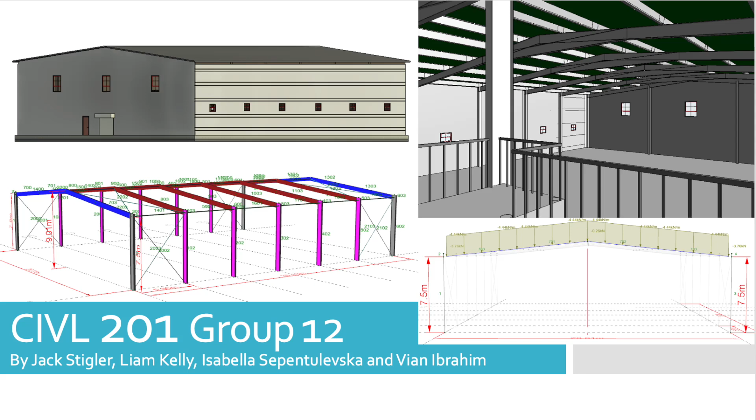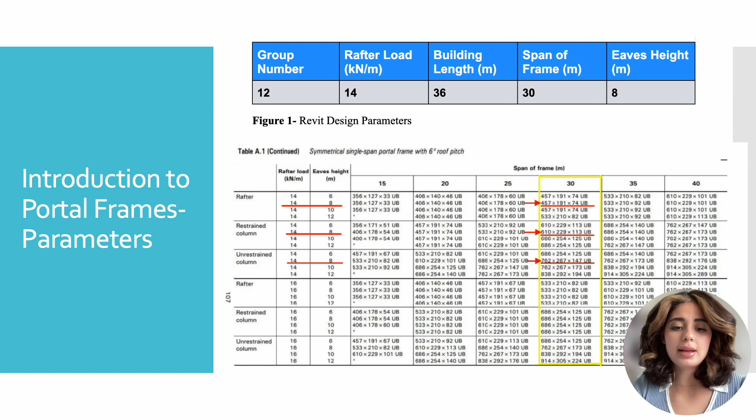Our project focuses on designing a portal frame. The main parameters include a span of 30 meters, a length of 36 meters, and an eave height of 8 meters with a rafter load of 14 kN per meter. Portal frames are commonly used because they provide a large clear span, cost efficiency, and flexibility, making them ideal for warehouse and industrial buildings.

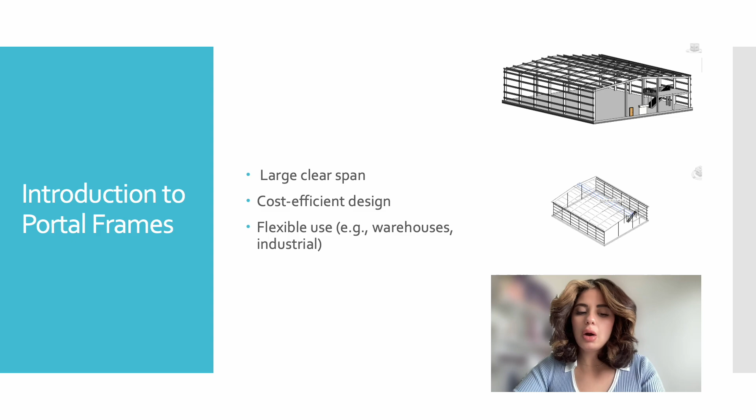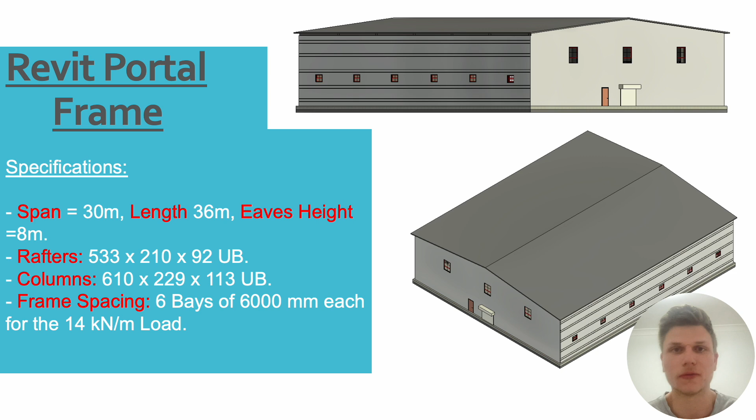These parameters were applied consistently across both Revit and Space Gass to ensure accurate modeling and structural analysis. The Revit portal frame structure aligns with the client's needs with 7 girts, 6 bays spread at 6 meters apart to distribute the load across the larger columns and rafters selected at 533 x 92 UB and 610 x 113 UB across the 30-meter span.

The 6-degree roof for wind and rain complications is essential, where the girt and purlin sizes still offer sufficient stiffness for spans above 5.7 meters while not compromising on material wastage, also effective for the length of 36 meters.

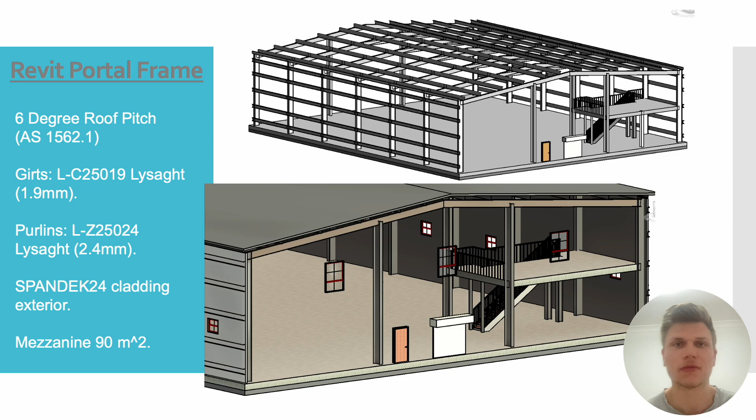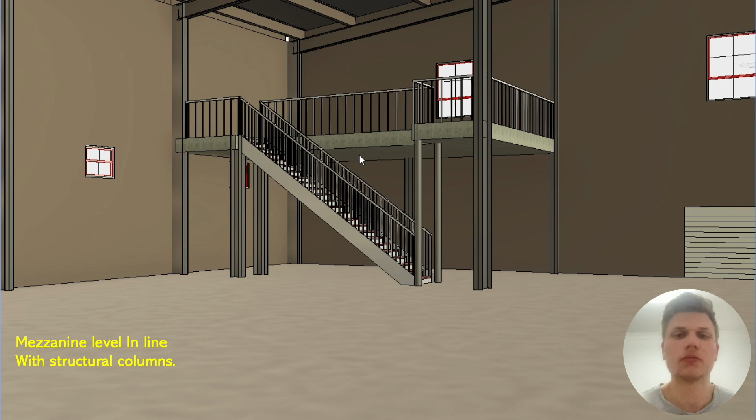In addition to the Spandek 24, the mezzanine size of 90 meters squared ensured it was in line with the structural columns and the floating platform for additional usable floor area. Secondary joists were also supported in the deck system, shown by the abundant essential floor area for the industrial setting. Structural framing connections involve the C-girt, rafter, and columns.

15 total windows of fixed and double hung ensure sustainable natural lighting and continuous fresh air flow throughout, while the large overhead door is suitable for deliveries and large loads in and out of the portal frame structure.

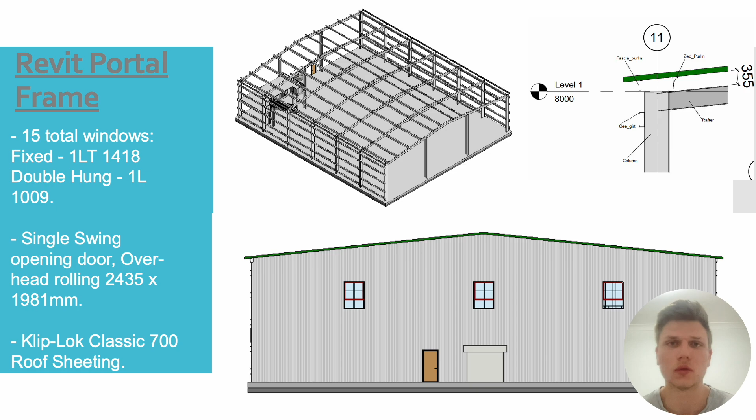Ultimately, the windows through to the back side decrease energy lighting costs while ensuring visibility in contrast with the 4-meter high mezzanine. The Klip-Lok 700 roof sheeting is weather durable as the 50mm overhangs lessen deformation on the roof of the structure.

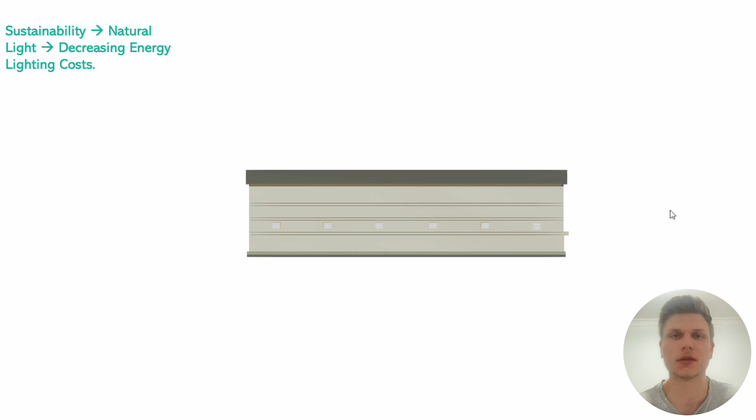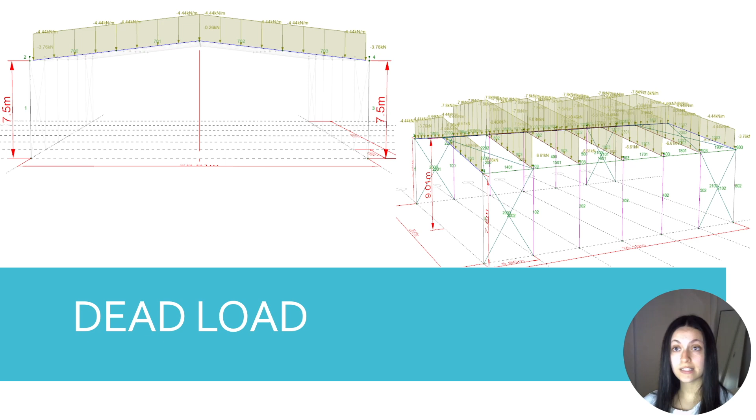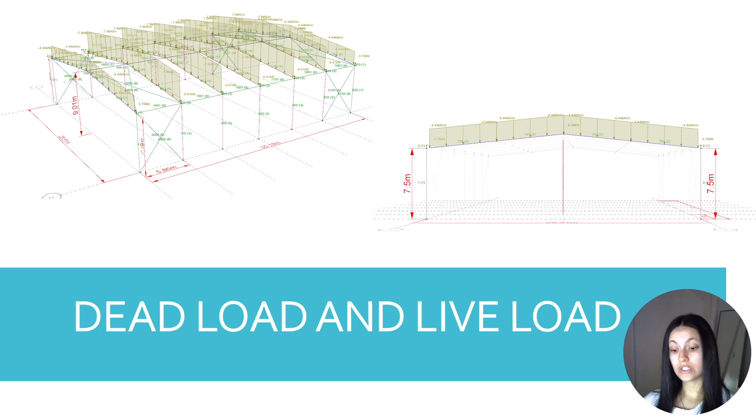So today I'll be talking about the main types of load that act on the structure. First up is the dead load. This is the permanent weight of the structure itself, including stuff like concrete, steel walls, floors, and anything that doesn't move within the structure. Second up is the live load. This is extra weight that can change, such as people, furniture, vehicles, and/or equipment. We also have a combination load between dead load and live load. This is just to show engineers how the structure handles both loads at the same time.

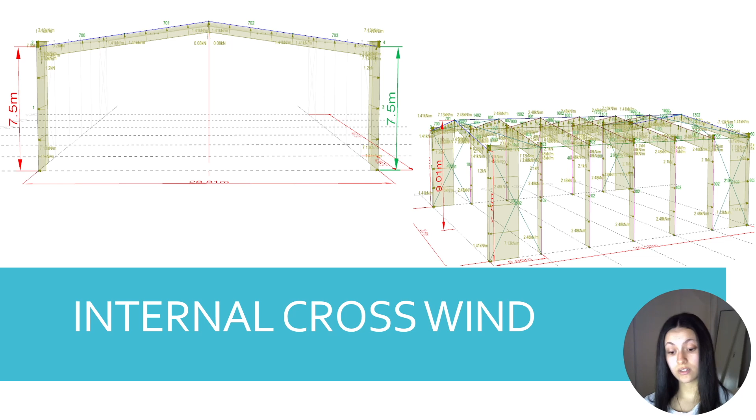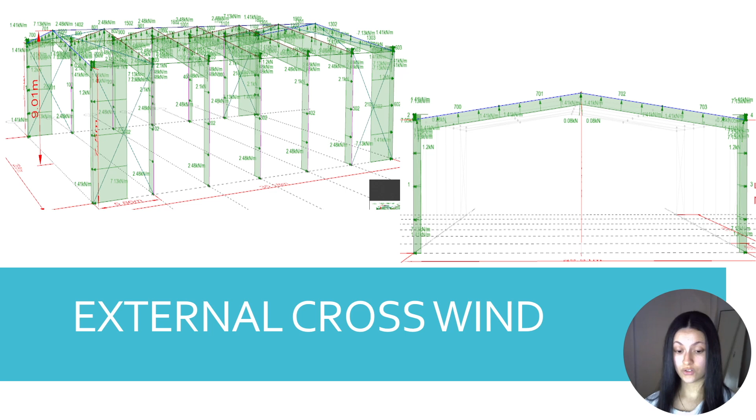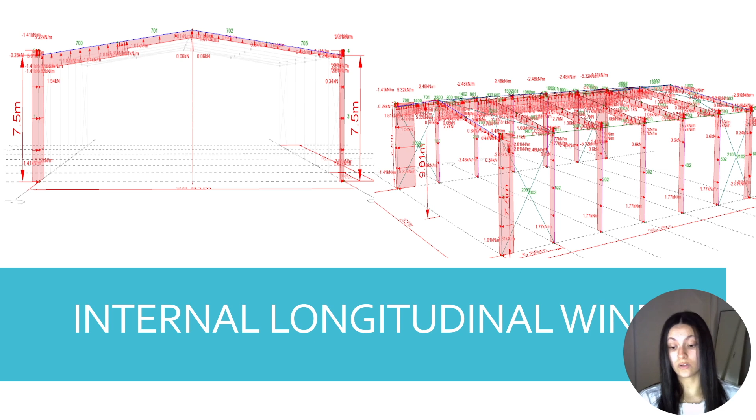Here we have the internal crosswind. This happens when wind gets inside a structure, such as through openings or gaps. Here we have the external crosswind, also known as WCE. This happens when wind is pushed outside the structure, creating side pressure or sway. Finally, we have the internal longitudinal wind load, otherwise known as WLI. This acts along the length of the structure, for example, through a tunnel or a long covered corridor. It's important for engineers to understand these loads and how they work together to help design buildings and structures that are safe, reliable, and sturdy.